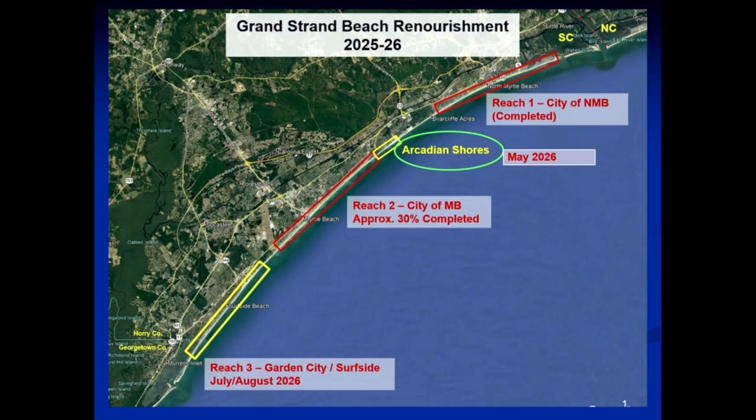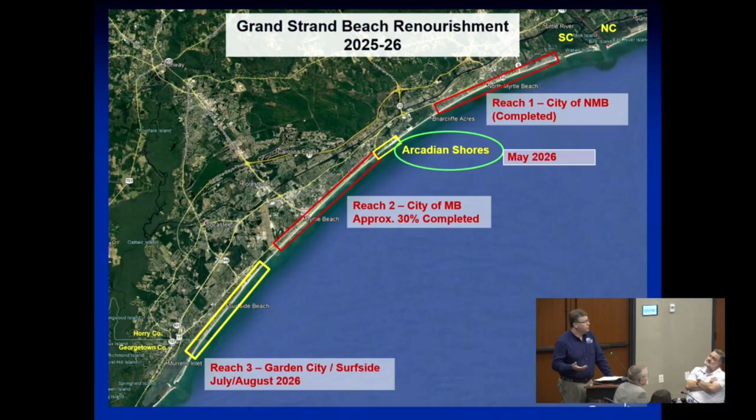The work in Reach 1 has been completed, mainly up in the North Myrtle Beach area. Then the contractor moved down to Reach 2, basically the Myrtle Beach area. They completed about 30% of the work there and then moved up to the Arcadian Shores project. So we've got 2 projects going on concurrently: the much larger federally funded Reach 1, 2, and 3 project by the Army Corps of Engineers, and then the Arcadian Shores project, which is locally funded as a joint effort with Horry County and the City of Myrtle Beach.

So the Horry County portion started on May 6th, and that quantity is 220,000 cubic yards. As of May 17th, approximately 204,214 cubic yards had been placed. The Myrtle Beach portion started May 17th, and that is 230,000 cubic yards. The projected completion date was May 29th. When we put this slideshow together last week, that was the anticipated completion date, but it's moved just a tad to May 31st now.

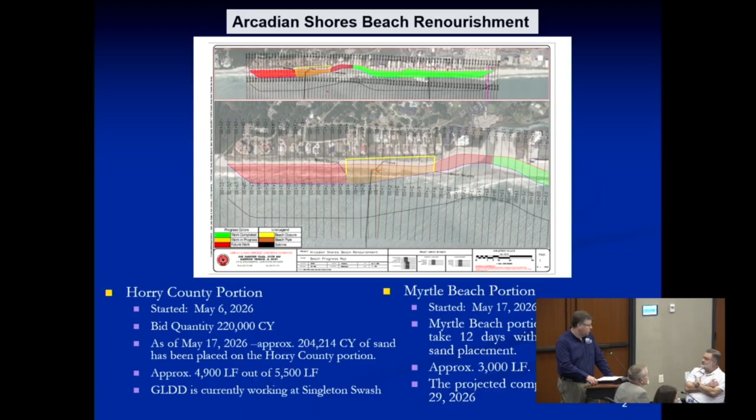So this is what the project looks like. This right here is actually subline 2, which comes up in between the Apache Pier and Singleton Swash. Basically, the dredge goes out to the borrow pit area, dredges the material off the bottom of the ocean, stores it on the dredge. The dredge then travels to where the submerged pipeline is, hooks onto that pipeline, and then using seawater pushes that sand up onto the beach.

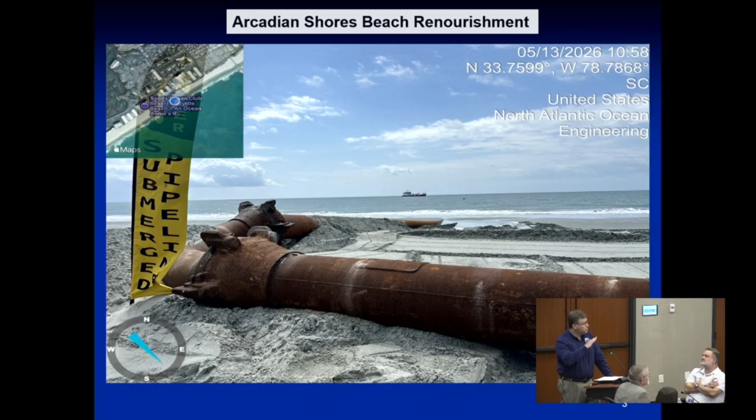So this one, originally, that elbow you see laying there was flipped in the other direction, and they pumped north up to Apache Pier. Once they finished that, they rotated it over and pumped south towards Singleton Swash. Since then, all this work is completed. The pipeline is removed, all of that is off of the beach now.

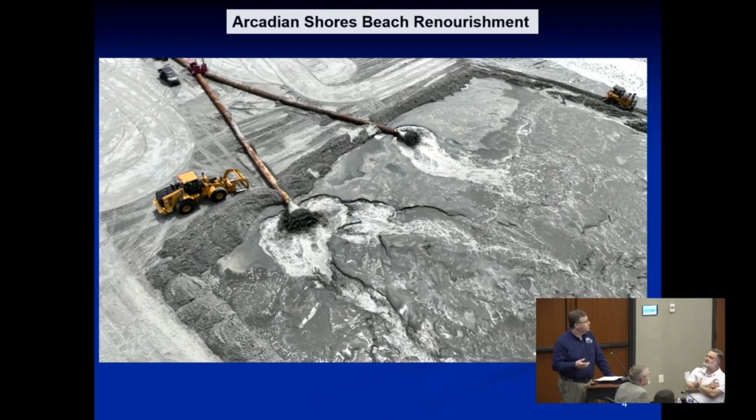So this is what it looks like whenever that material comes up on shore. They basically use dozers to push up berms around the area. The pump then discharges that material onto the beach. When it's coming through the pipeline, it's moving at an extremely high velocity. That velocity is what keeps the sand particles suspended. Once it's discharged out onto the beach, velocity slows down. When velocity slows down, particles settle out, and then water trickles back out away from the area.

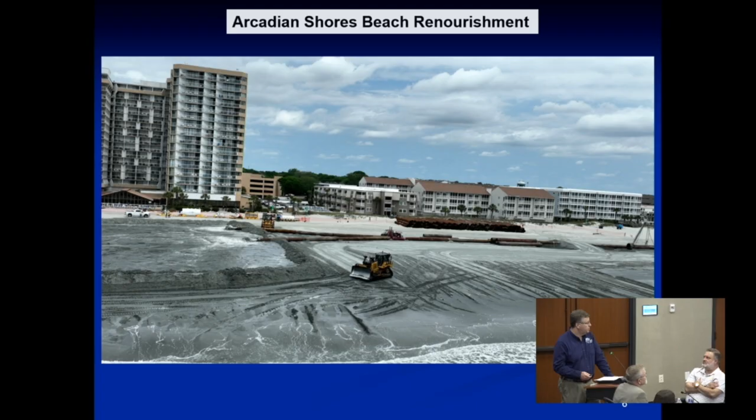That's the material coming up onto the beach. This one here, you can see how they built the berm around the area, and they discharge it in there. Once it's had a little bit of time for the water to drain out of it, they'll use the dozers to work it on the beach and shape it and form it into what it needs to look like. That's what you see going on here.

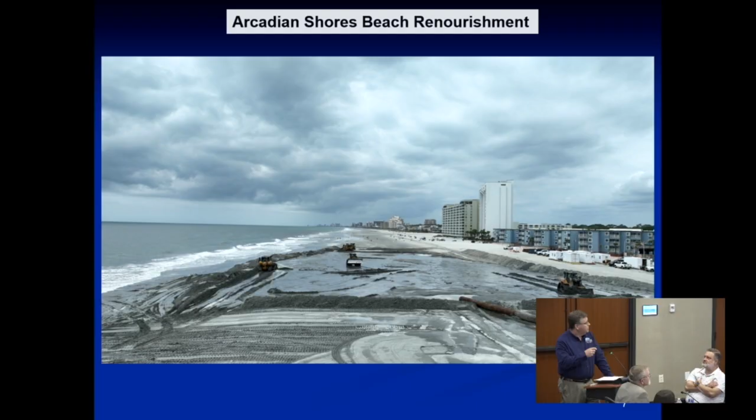They're shaping it. As you can see in the foreground at the bottom of the screen, you can see how it's already kind of shaped there. And so then they're working in the work area there.

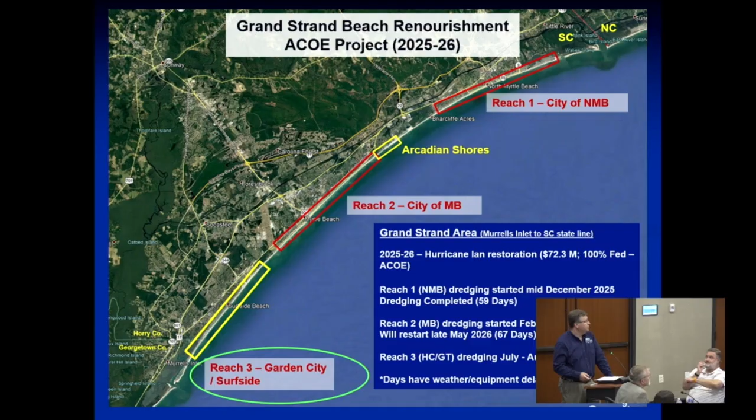So like we were just saying, Reach 1 is completed. That was 100% federally funded, by the Army Corps of Engineers - that's the Hurricane Ian Restoration Project. Reach 1 started in mid-December and is now complete. Reach 2, they started in February and then moved to the Arcadian Shores project. They'll be coming back late May. Whenever they finish up Arcadian, they'll be coming back to Reach 2. Looks like they've got about 5 more days or so in Arcadian Shores, then they'll be back in Reach 2, and then they'll move on to Reach 3 after that.

So this is Reach 2. The work in green has been completed. Right there in the middle is what they're planning to come back to here in a few weeks, and then finishing it up by the end of June or so.

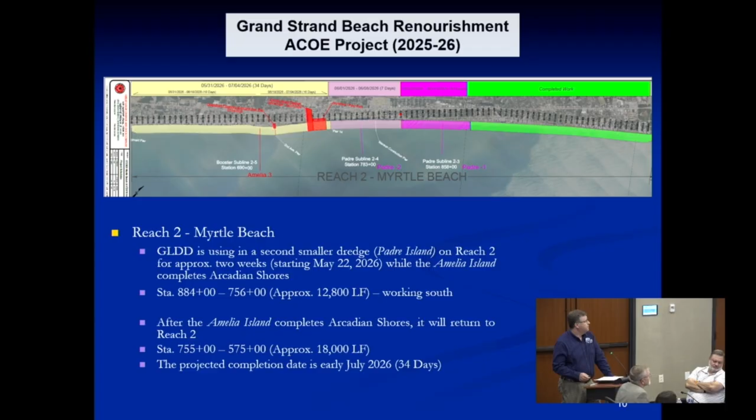One thing to note on that too, the main workhorse that the contractors had on this project is the Amelia Island. It's their newest dredge, it's also their largest dredge. But they do have another dredge, a smaller one, the Padre Island, which has been working down in Florida and is now on its way to another job.

But on its way to the next job, it's going to be passing through the area, and it has some time. So the Padre Island is going to stop in and help out for several weeks before moving on to its next job, completing the work there on sublines.

We already jumped to Reach 3. But the 2 sublines, the Amelia Island has already worked its way south. Padre Island is going to pick up and pump on shore at the next 2 sublines. The Amelia Island will be pumping on at the 3rd subline down from there. So they'll be working concurrently for the next couple of weeks.

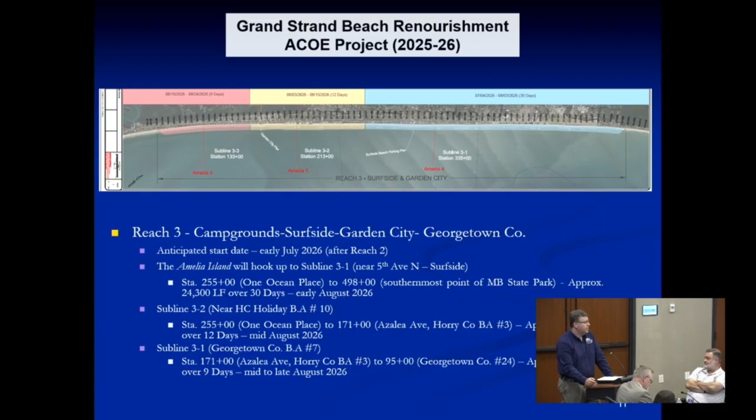As of Friday, the Padre Island was still in Florida, but as of today, it is on its way. It's just offshore and a little bit to the south of Savannah right now today, so it's en route to the area.

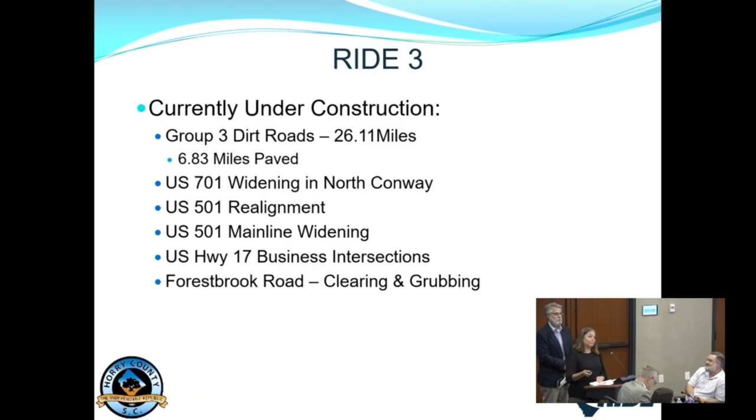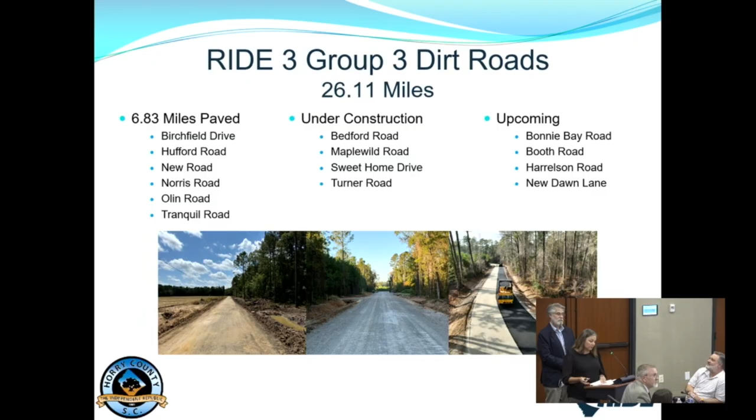Updating on the Group 3 Ride 3 dirt roads, we now have 6.83 miles paved. You can see the roads there that have been completed. Right now under construction we have Bedford, Maplewild, Sweet Home, and Turner Road. And upcoming we have Bonnie Bay and Booth Road, Harrelson, and New Dawn Lane. So there's been a lot of activity on the dirt roads, and more to come.

As far as 701 widening in North Conway, I know everybody's been excitedly anticipating this one. The contractor did begin mobilizing last week. We've had our pre-con. They've gotten a bunch of barrels set up, started putting their traffic control out, and started mobilizing equipment in anticipation of starting. I think they would have started this week had we not had the weather we've had, but as soon as things dry out, I anticipate seeing a lot of activity beginning on 701.

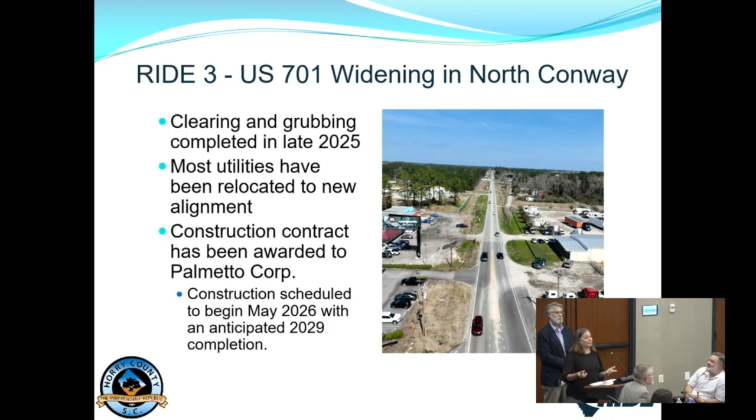In addition, Santee Cooper has been out there relocating their poles in the job site, so this project should be able to make a lot of headway. That's kind of the last of the utilities it has to get moved, so they should have a clean slate to work in once they do get going.

Another project, this is the 501 realignment. I can't remember if they had started or had taken the buildings down the last time we met, or if it was getting ready to start, but we have had the removal of the buildings in Myrtle Beach, and a lot of activity is taking place in those areas where the buildings had been. One thing I wanted to mention, on all of these big projects, we do have summer lane closure restrictions that started as of Monday, Memorial Day.

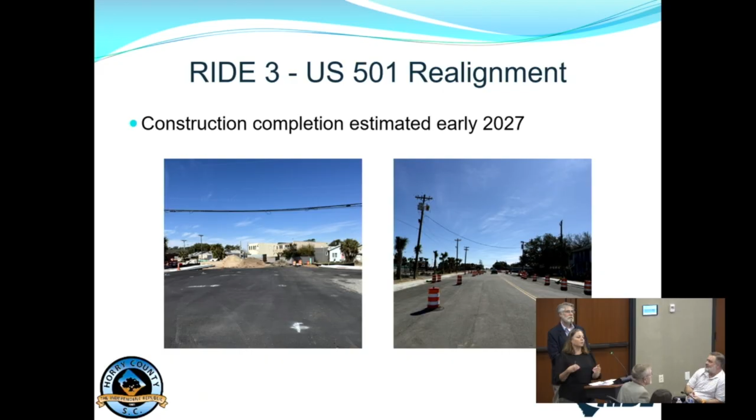But a lot of these projects will continue to have activity because there's a lot of area that can be worked in outside of the lane closures on all of these projects. So the only thing that is restricted are lane closures, not the work. So this project in the area where the buildings were is still going to have a lot of activity taking place over the summer.

We also have the 501 mainline widening, and if you've ridden through there, there has been a flood of activity over the last month out there. What they've gotten installed is the new third lane, with the base installed and some intermediate. So what you'll see this week, beginning this week, is they're going to be installing barrier wall, blocking off the inside lane. You'll now be shifting traffic to the new outside lane, the two outside lanes, because over the summer, there's going to be a lot of work taking place on drainage in the median.

So they finally got the paving kind of completed last week in the outside lane and the intersections. This week you should see the barrier wall going up, the shifting of lanes to the outside two lanes, so that over the summer the work can take place in the median, so that when the summer lane closure restrictions are lifted, they will be able to do the final asphalt surfacing and paving.

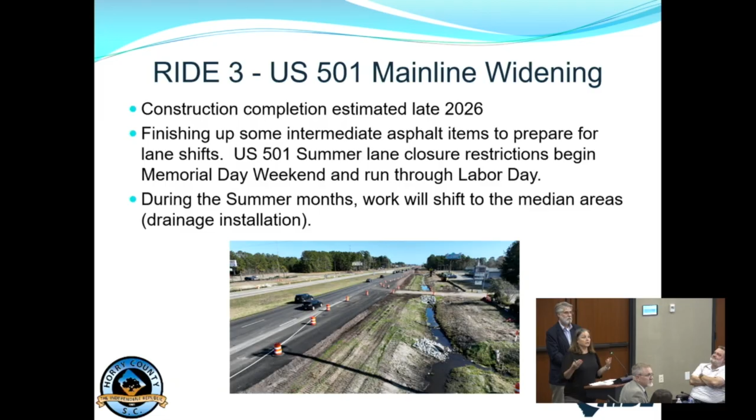The 17 business intersections update is pretty much the same because we are still in the utility relocation window until later in June. Utilities have been relocating, doing some drainage work, and just some sort of activities that can take place while the utilities are relocating. Hopefully that utility window is going to wrap up here shortly.

I don't know if you've ridden down there, but there's a ton of barrels out there. There's a lot happening. Again, this is another one that's got lane closure restrictions, but it also has a staging plan, so we'll have different stages of traffic control down there, and work will be happening over the summer. We'll just try to limit those lane closures on 17, so work will be happening on the side streets during the summer.

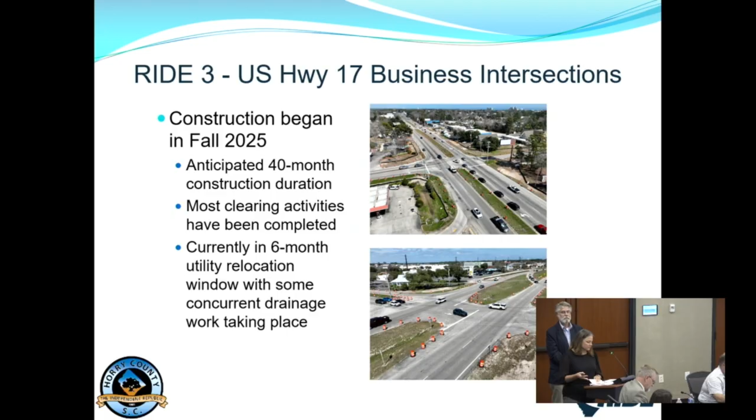Now, I know since we've spoken, a lot has taken place on Forestbrook. The clearing and grubbing contract began in earnest this month. In particular on the Dick Pond Road end, there has been a lot of clearing taking place down there. There's been clearing activity, some demolition activity started last week, and it's starting to really change the face of that end of the Forestbrook project.

Right now, their clearing is starting on the Dick Pond Road end and moving towards 501. Also, the utilities have gotten out there and gotten a jump on getting their relocations, kind of trying to follow behind the clearing. But if you haven't ridden down there, especially on the Dick Pond end, there is a lot of activity taking place.

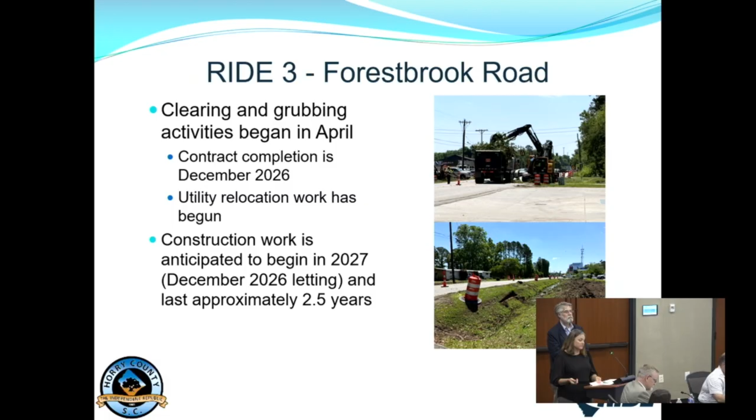And then finally, we talked about this one last time, but Jessica has gotten some good drone shots since we spoke. The widening project in Loris is essentially complete. There are still a few more punch list items to take place, but we did get these drone shots of the project, and it really looks good. So I wanted to share some pics of this one.

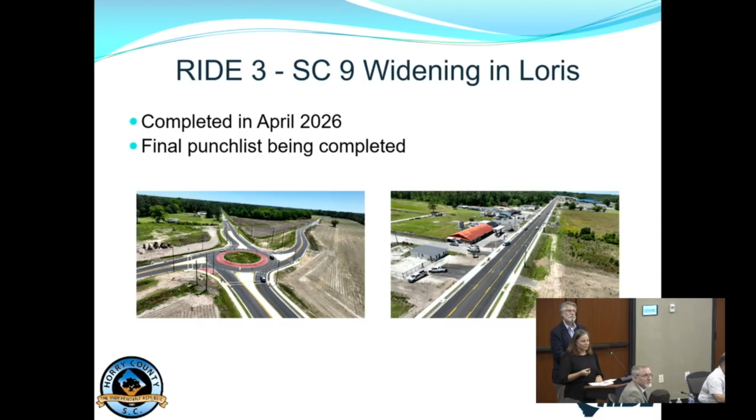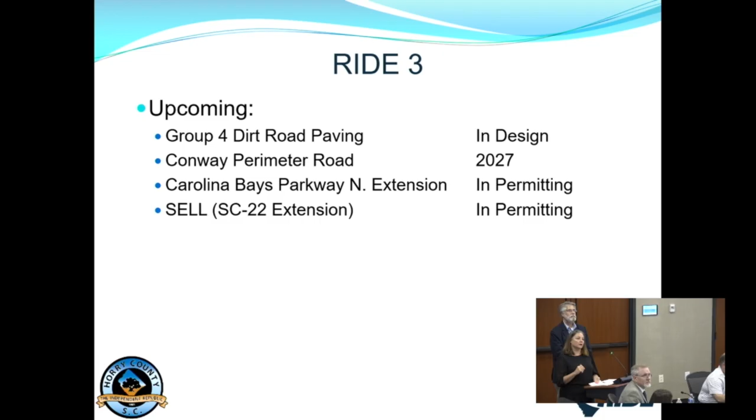This upcoming list is pretty much the same. For Ride 3, we've got these 4 projects that are still out there upcoming. Not much has changed on this slide as far as those projects go.

This upcoming list is pretty much the same. We have a few more projects over the next couple of months that we'll be looking at to get designers on board, but this list hasn't changed much since the last time we met.

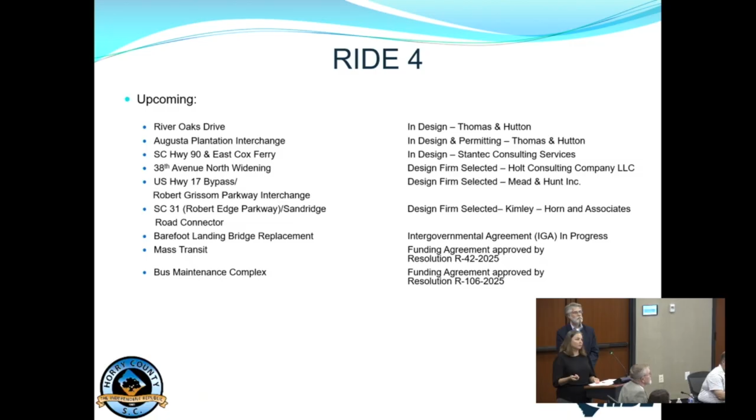That's all I've got. Are there any questions? Anybody from the committee? I have a couple.

On the upcoming projects that are in design and permitting, do we have any idea what the anticipated completion date is, or when people can see dirt moving on those projects? Most of the projects in design so far, I think, are anticipated around a 2 to 3 year design schedule. Some of the simpler ones, we're hoping we can push that.

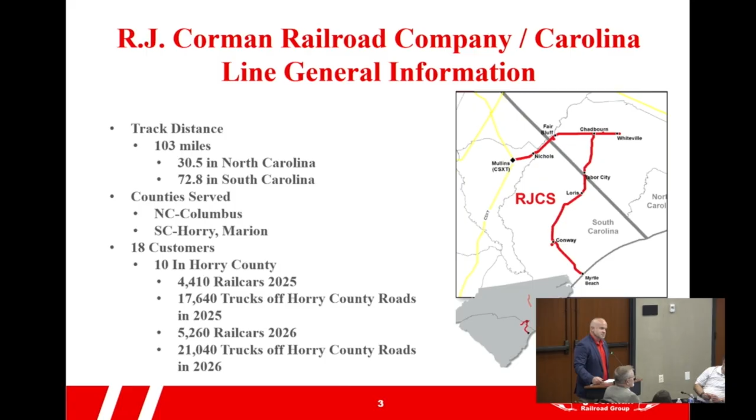I'll let Jackson go over this. Hello, everyone. My name is Jackson Curran, part of our government affairs team at RJ Corman. Just a little bit about the CRISI program.

I know we were here towards the end of the year last year talking about Horry County's match and kind of the scope. In terms of the scope and everything, nothing really has changed. The only change you might see is that our engineering team increased the contingency/escalation percentage by a couple percentage points, but nothing changed scope-wise. So still mainly upgrades on our ties, track, switches, and so forth.

For the CRISI program itself, when we came to you first last year, we were kind of just waiting on the FRA to give us an announcement of when the notice of funding opportunity would come out. We were gathering all the information we needed from past applications, and we were just waiting and waiting. And finally, April 20th came around this year, and the FRA announced that they were taking in applications.

At first, it was only going to be for a pool of about $1 billion at the federal level. They ended up combining fiscal year 2025 and fiscal year 2026, and now the available pool is about $2 billion, a little over that. And we have until June 22nd, 11:59 p.m. Eastern Standard Time to submit those applications.